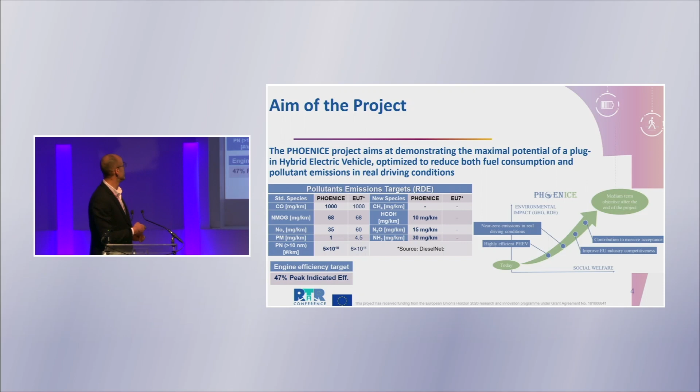In terms of pollutant emissions, you can see the PHOENICE target in the first column is more stringent than Euro 7, as compared in this table, specifically for particulate number and NOx. Additionally, we have some unregulated emissions that you can see here: formaldehyde, N2O, and NH3. This is regarding the emission target.

In terms of efficiency, we are aiming to achieve 47% efficiency on the thermal engine. That brings us to around 5 to 10% fuel consumption reduction, considering charge-sustaining mode, because we are dealing with a plug-in hybrid vehicle.

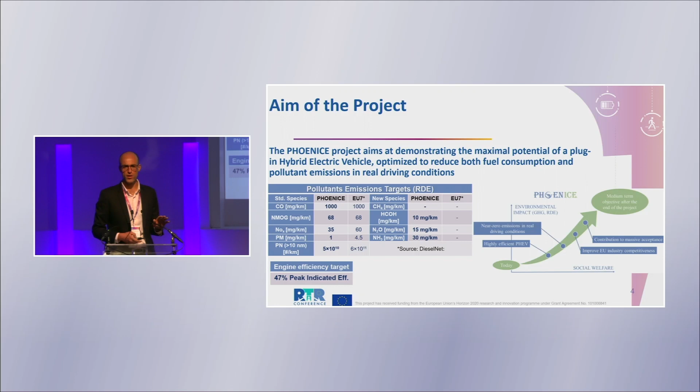Let me now introduce the baseline vehicle, which is a Jeep Compass from Chrysler, Stellantis Group. This vehicle is a PHEV SUV.

We have an internal combustion engine, state-of-the-art, with 1.3 gasoline direct injection, wastegate turbo, and also a variable valve actuation system, which is multi-air. Additionally, 2 electrical motors positioned in P0 and P4, with a reference autonomy of 50 kilometers.

However, it will be simulated to 80 kilometers during this project. This is the baseline vehicle.

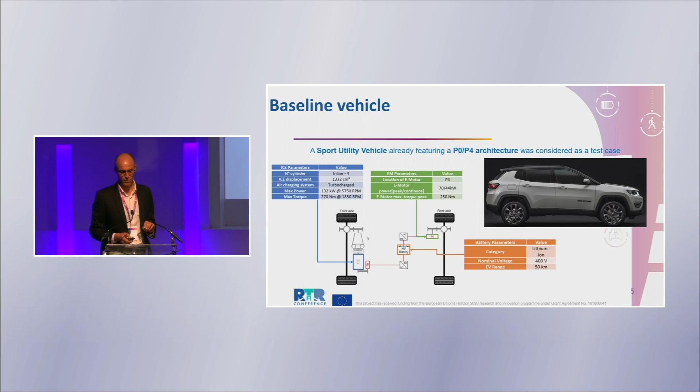How to achieve our project? We are working on different groups. The first group is the dual dilution combustion engine. Dual dilution means lean combustion, so dilution by air, but also exhaust gas recirculation, which will allow us, with additional technologies, to achieve 47% efficiency.

In parallel, we developed new components for the dedicated exhaust after-treatment system for lean burn, in order to meet our target. We can list an electrically heated catalyst, a new GPF with specific coating, and also SCR for NOx abatement under lean conditions.

We also investigated the potential of global efficiency increase using exhaust heat recovery systems. We investigated two of them, and finally, once we developed the different components and redesigned some components, we needed vehicle integration and development of additional controls.

So the integration of this new internal combustion engine, the exhaust after-treatment system, and the other parts were done according to an emission-based energy management strategy.

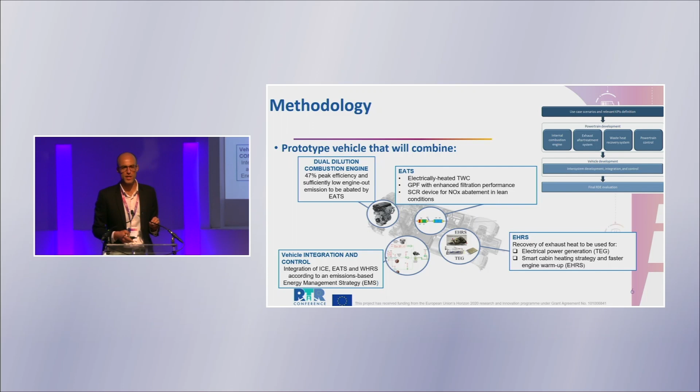Let's start with the development of the prototype engine. We started with the baseline 1.3 GSE called Fiat engine, which is the serial engine on this Jeep Compass. We increased the compression ratio.

Theoretically the maximum efficiency of an internal combustion engine is directly linked to the compression ratio, so we also adapted the con-rod. Additionally, we developed a cooled low pressure EGR system with Valeo that was implemented on this engine. We modified the cylinder head by applying the IFP Swumble approach in order to boost the flow motion.

The fuel system was increased to 350 bar of maximum pressure instead of 200, which is for the serial engine. We performed an additional optimization of the VVA system, and our partner, Garrett, developed specifically for this vehicle an electrified turbo.

So an E-turbo with a VNT, variable nozzle turbine, replacing the Wastegate serial turbo. It is a 48-volt E-turbo boosting system. All this modification and all these new components were implemented, and we manufactured 4 prototype PHOENICE engines. First one for steady-state calibration experiments, based at IFP Energies Nouvelles. Second one for transient calibration at Polytechnic Torino. Third one for the vehicle integration, and a fourth one is a spare part.

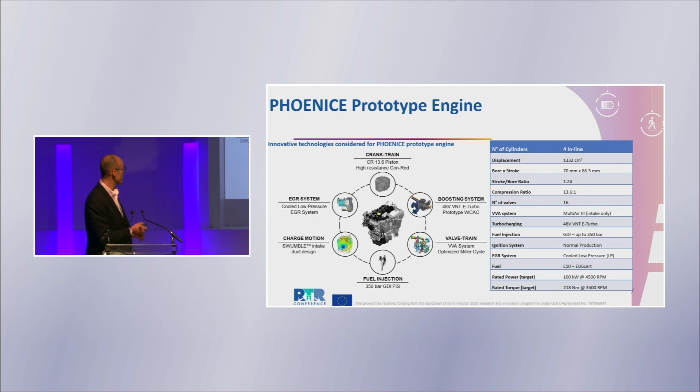In parallel, we also developed a digital twin. Starting from Stellantis, Centro Ricerche Fiat gave us a reference model for the reference engine, and Polytechnic Torino upgraded it in order to have the PHOENICE prototype model. It was validated with the first very early engine results, as you can see.

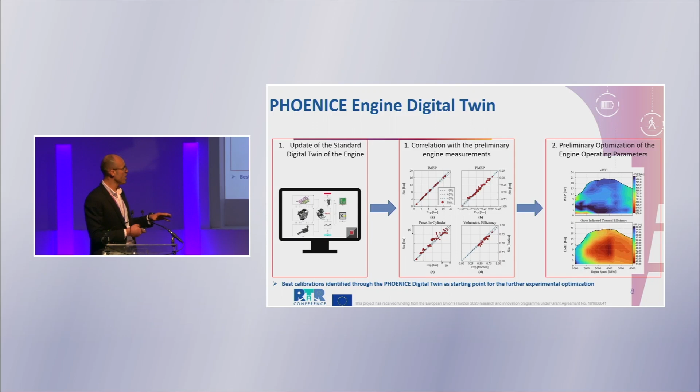This digital twin was used in order to pre-calibrate. You can see here an example on the right side of pre-calibration regarding the variable valve actuation. Once we identified the best set through this PHOENICE digital twin, we considered them as a starting point for further experimental optimization.

We installed the first prototype engine at IFPEN engine test bench and performed different optimizations. I'm not going through all the parameters because we have a large number of them, but this first graph illustrates the final results in terms of indicated efficiency.

On the y-axis, you can see the brake mean effective pressure, which is an image of torque, and on the x-axis, we have the engine speed. You can see that we were able to achieve almost 47% gross indicated efficiency. Compared to the reference engine, that's between 5 and 15% efficiency improvement.

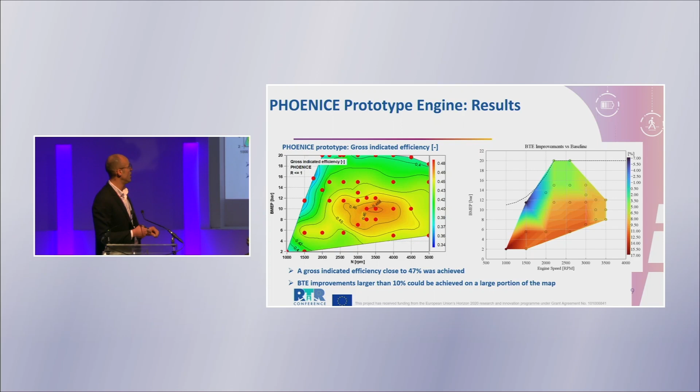This right side figure, with the same y and x axis, illustrates the difference in percentage between the prototype engine and the baseline engine. This can lead us to around 10% of global efficiency.

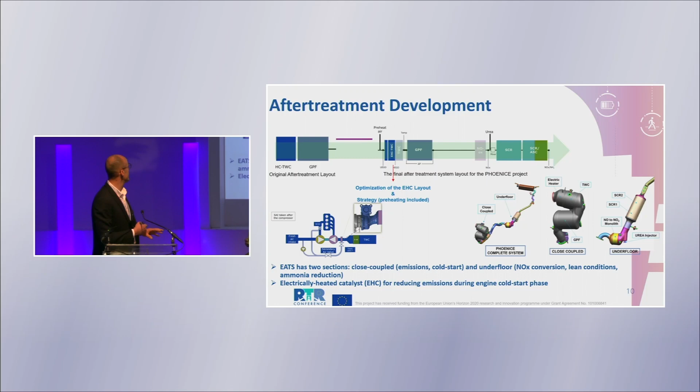Regarding the after-treatment system, the exhaust has two parts. The close-coupled one, typically for lambda 1 gasoline after-treatment, starts with an electrically heated catalyst for reducing emissions during engine cold start. We have a new three-way catalyst, a new GPF with specific coating. So this is the close-coupled part for lambda 1.

But we have also implemented and developed new components for NO oxidation, in order to optimize the NO and NO2 ratio, because it's very important for the SCR reaction. Then we have the urea system, the SCR, selective catalytic reduction, and also an ammonia slip catalyst. All these components were specifically developed for PHOENICE in order to achieve the target pollutant emissions, but also tested before the assembly, which was done by Marelli.

This assembled exhaust line equipped the second engine, which is for transition calibration, and the one that goes to the prototype vehicle.

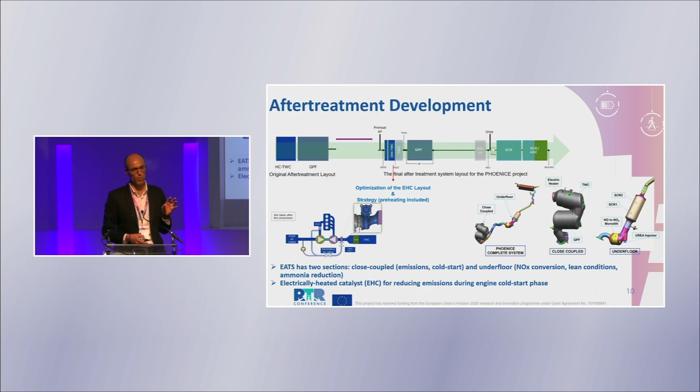We have also performed transition calibration at Polytechnic Torino, in order to calibrate the engine to switch between different modes - low, lean, lambda 1, EGR - depending on the coolant temperature and on the exhaust temperature. This is to perform a kind of trade-off between exhaust emissions and engine efficiency.

Once this is done, you can see on the right side, we disassembled the normal production vehicle. Then we implemented all the different components, but also a new 48-volt system, because the e-turbo and the e-cata needed this 48-volt system. Successful integration was done by FEV Italy with the support of Stellantis, and functionality testing of the installed SCR urea dosing was performed.

I'll go quickly because we will see more interesting pictures and video later. The last phase was to fine-tune this vehicle calibration in order to comply with the worst-case real driving emissions, which we developed in work package 1.

During this project, you can see very impressive acceleration. Here we cannot see the slope, but it's almost 2 hours of RDE cycle with different velocities - it can go up to 100, it can go to 135, almost 140 kilometers per hour.

So the calibration is proven. The vehicle is delivered for final tests that are going on this month, because it's the last month of the project. The last task is to validate this prototype on the WLTC cycle to assess the CO2 gain with respect to the reference vehicle, but also to assess the pollutant emissions.

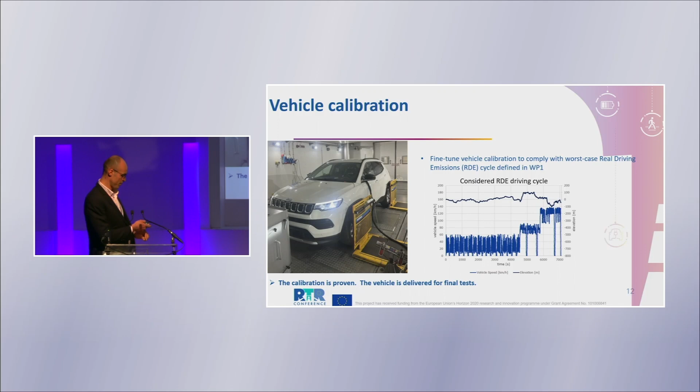This project provides a new high efficiency combustion system, a study of the potential of heat recovery systems, the exhaust after-treatment system developed specifically for a lean gasoline engine, and a lot of know-how and methods for virtual calibration.

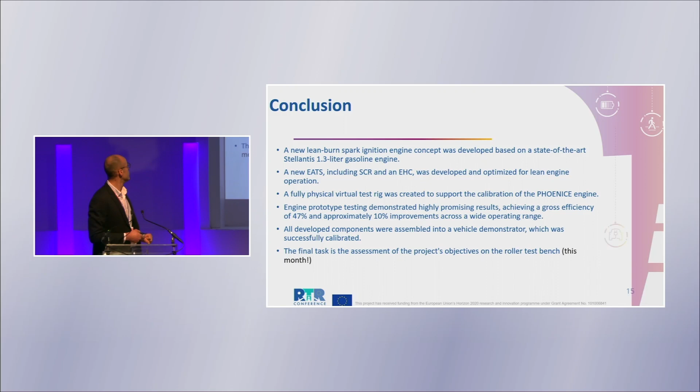Those are the communications that we presented. I can summarize here, but to not repeat what I mentioned, I prefer to go through some images and video.

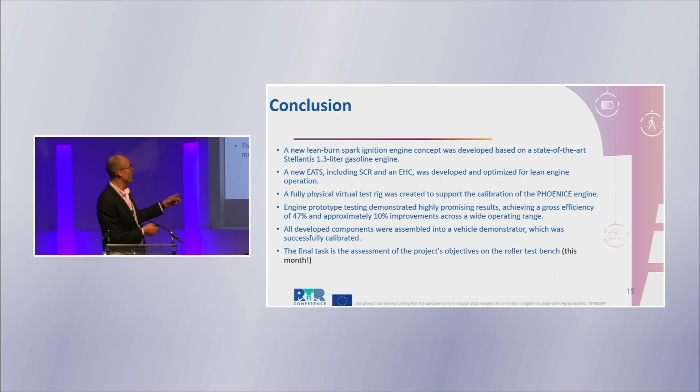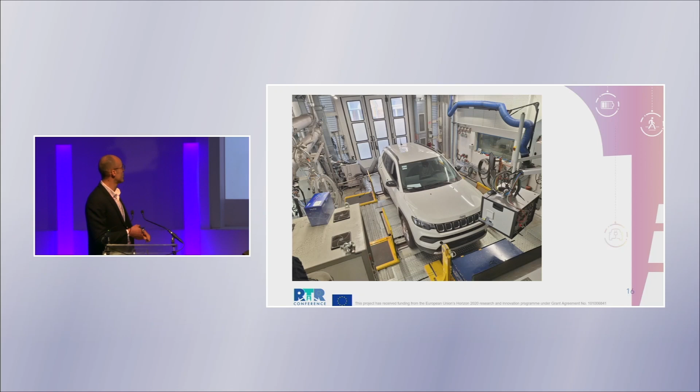Okay, so these are from this month, very recent, that's why they weren't integrated into the presentation. This is a prototype vehicle that is prepared to go through the test.

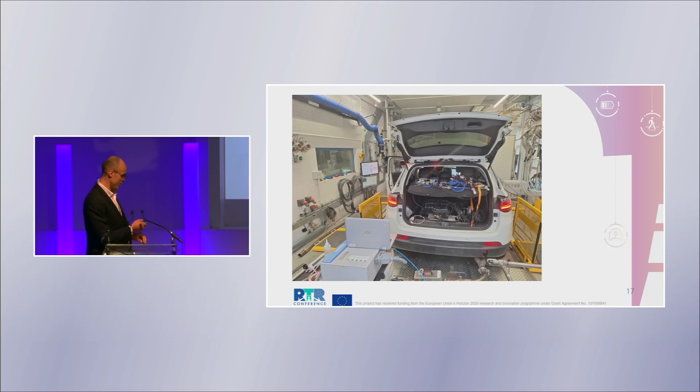Here you can see all the prototyping in terms of control. You can see all the urea systems that were installed. This is only a partial view of the system.

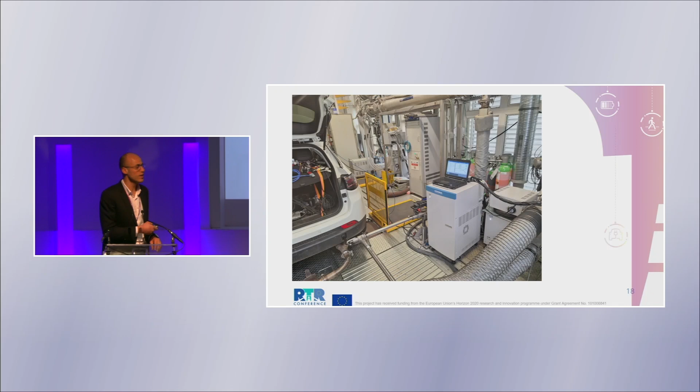Here we can see the FTIR specifically, in order to measure the unregulated emissions, in addition to the particle number emission for example, and also the classical emissions that were measured.

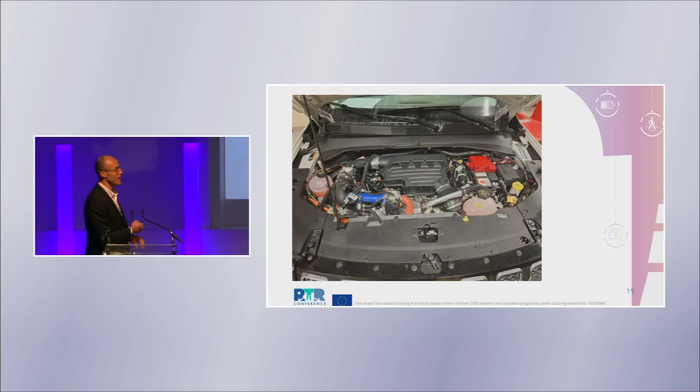These are all the components that were very well integrated, so we can close the hood and drive the vehicle. This was a challenge because we have EGR and many components.

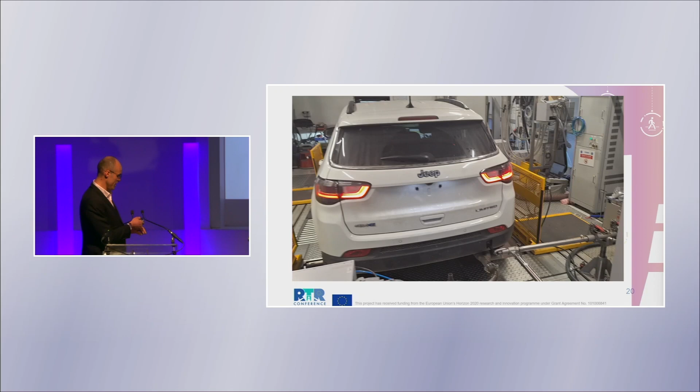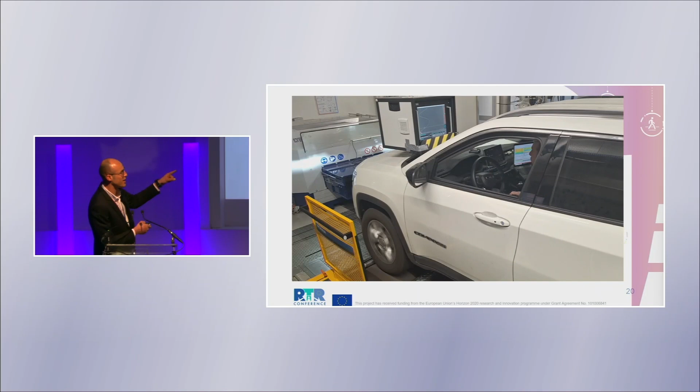Here is a video during the RDE calibration cycle. You can find the same cycle as illustrated on my slide, and you will see the driver trying to follow it, with deceleration then acceleration. On the y-axis you have the speed. This is the PHOENICE project running on the defined RDE cycle.

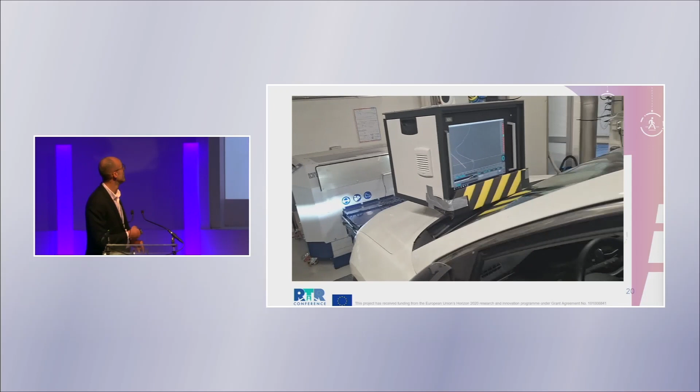Thank you for your attention, and I'm happy to take any questions later.

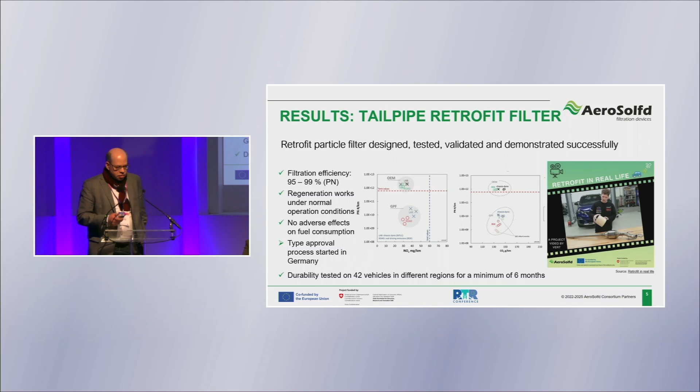Let's give you some pictures. Regarding the exhaust, there's a great video on LinkedIn and on our website. Done in Lichtensteig, you see the whole process of retrofitting a car - getting the old exhaust system out and the new one in. If you look at the diagrams, you can see on top the OE, and then the reduced particles with the retrofit solution. It's working fine.

There is no bad effect on fuel consumption. For NOx, we said if the original solution is not working, then we replace it with the original solution because that should work - so there is no NOx part on our side, we just focus on the particles. We achieve high efficiency. We have run the vehicles in Europe - great work, no problem. Even the regeneration works under the conditions for the gasoline engines.

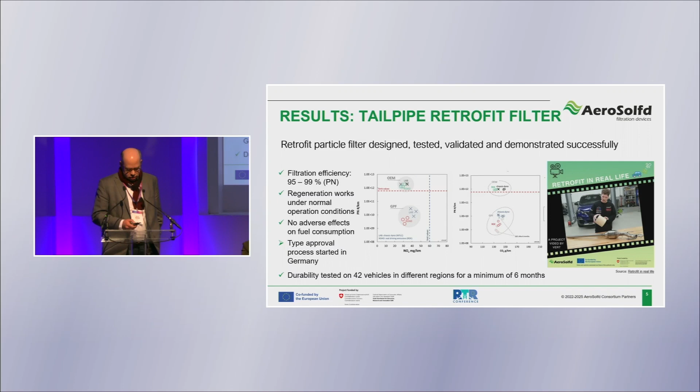Regarding the brake emissions, our focus is to look at what's really happening in the city and what the health effects are later if we reduce particles there. So we did measurements in Valladolid, in Ljubljana, and Ancona with ICE engines as they're running, and Mauricio insisted on doing that with hybrid, and we wanted to get the CAN bus data.

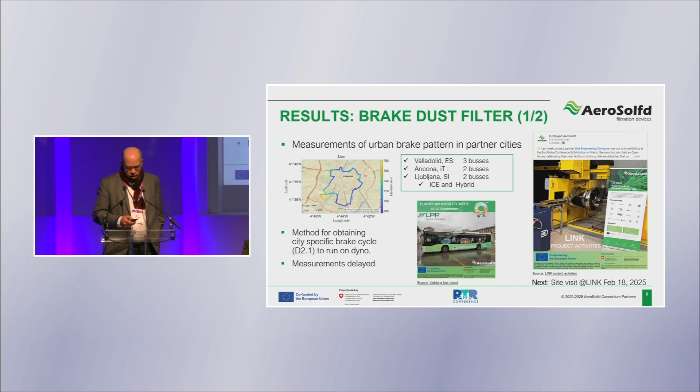This took us a long time - we waited and asked again and again, and finally we got access to it. Now we have the data, we can really see when the bus is braking, when it's recuperating. So we are analyzing the data at the moment. The tests are starting at Link for the emissions. Unfortunately, we have to postpone that site visit because we don't have the data yet. It will be in March or April when we have the site visit scheduled.

What else did we do? It's about healthier aerosols in urban cities - what is your exposure if you are standing at a bus station? It would be nice to measure that in a city, but with scientific grade equipment you can't place it in a public space. Luckily, we have the bus partner AUVASA - they have a bus depot. So whenever a bus returns, we put a line over there on the street and said, stop here. And then we measured the bus braking, both inside the bus and outside the bus.

Unfortunately, some pictures had the bus driver in them, so we had a GDPR topic to solve. It's solved now, we can work with the data. Also, our partner ZF showed the brake dust particle filter at the IAA truck, a big exhibition. You can see that truck with the glass transparent window. The filter was a great success, from what I've been told.

People are interested, and it will now go on the trucks in Sweden, in Finland, for the winter testing. It passed all the tests, it passed on the road, so we're looking forward.

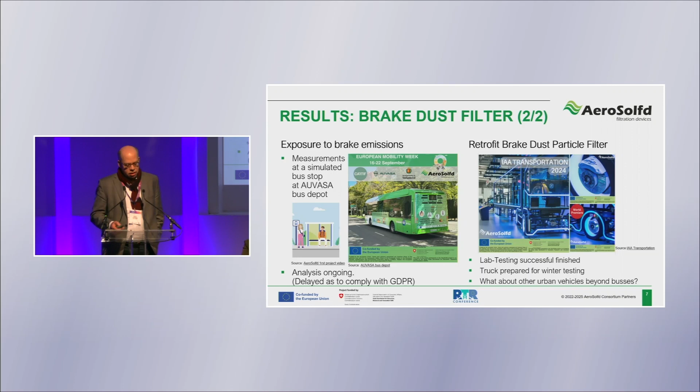And it came up the idea, why only buses? It can also be for waste collecting vehicles. So there could be a broader application for vehicles that are in an urban area, because their braking is different than if they would be on the long haul.

For the metro stations, we presented last time that we have identified tracers to let us know what emissions, what the exposure is related to the braking. This has been done, and now the installation.

One of the concerns was, what about vandalism? Will they be destroyed? Will they be spraying on? Luckily, this was a station where there's a football stadium close by, so there was a game with British football fans, no problem. There was also a concert of Taylor Swift, no problem. So we had all the extremes, it working great.

What did not work were the measurements. Some sensors failed, there was Sahara dust at that time when we did the measurements, so a lot of confusing things. We also had to learn that the HVAC system is turned off in the evening, so getting results, we can't make much out of that. So we had a lot of lessons learned.

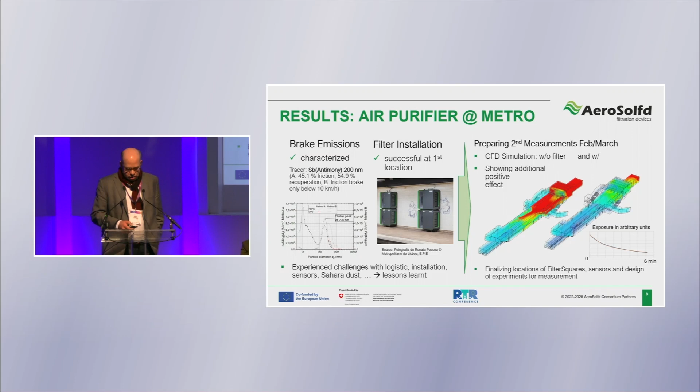So with filtration, we can see an effect. And if you look at the decay, the effect will also be within a few minutes, so that's important because trains are passing and trains are putting new emissions in. And this will work quite well. We have placed the sensors, we have decided where to put the filters. So measurements will start. Quotation is currently going on for the installation, and measurements will start in a month.

What else did we do? Preparing the market. We need to convince people that this is a great solution for an immediate effect on urban air quality. We are presenting at conferences.

We organized a workshop on metro air quality. That was a great workshop. It's a big topic, but nobody wants to talk about it. If you talk to cities, they say, oh yeah, perhaps, but we are commuting, we are the backbone of the city, don't talk about air quality. But we have to, and there are cities that do that, and they want to make their customers happy, and there are now solutions that we can use.

So we have been at Polis, and we have been at other places as well. So what will be the long-term effects? What will be the impact that we can generate with solid data, with a good environmental life cycle assessment?

The retrofit solution, it works. You don't need to get a new car, you can get the retrofit solution. Citizens will be happy, the city has a better air quality, so that should sell and that should work.

For the brake dust particle filter, we are almost close with the type approval, so that piece can go in the market. We have demonstrated that the solution is working, no problems. It will survive the filter test, the winter testing.

For the metro station, we are still missing some final proof of the exposure. Data is coming. For the life cycle assessment, this we need to do because we need solid data, we can't just do that with dummy values. So that will be the big task to continue on that.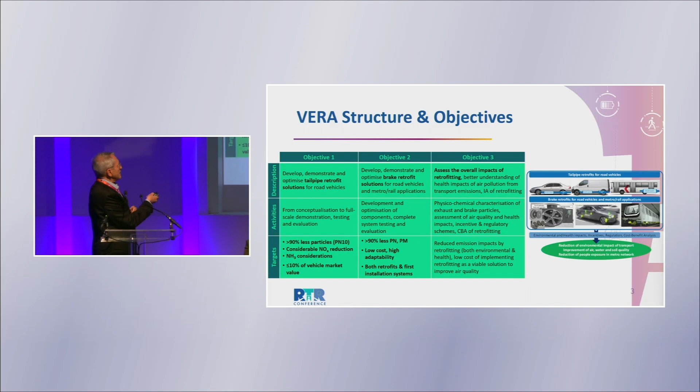It was not a straightforward exercise to select the vehicles. It was easier to look at brakes, because brakes have not been really looked after until now. Therefore, it was relatively more straightforward to decide what kind of retrofitting we could do. And as I said in the beginning, our main objective is really to assess the overall impacts in terms of cost effectiveness. So what did we do?

If we start with the exhaust retrofitting, first we looked at the market to see if there is any available market system, and we didn't find one, but a prototype.

This is a HJS, which is nothing particular, if I may say that. It's just a GPF, canned, bare GPF, without any catalyst on it. But we took it and installed it in a difficult environment, which is a PHEV Golf. This was a Euro 6B, and we tested it over a relatively large number of mileage. And we saw, as we were expecting, a very high efficiency of more than 90%. Even more interesting, this efficiency was improving as ash was accumulating in the filter, which was expected, without effect on pollutant emissions and without effects on CO2 emissions, which means fuel efficiency.

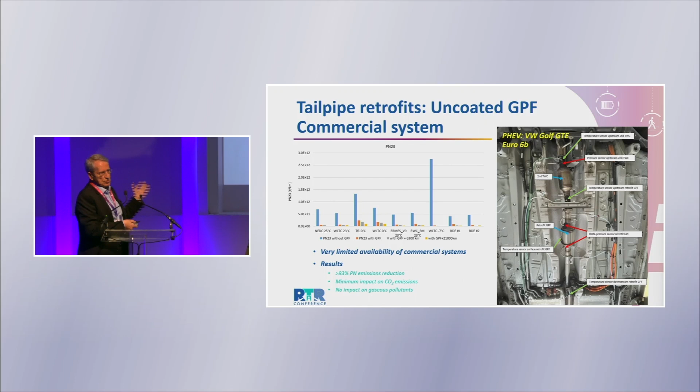So we said, okay, as our sister project does, I think we just validated that this is a possible approach. Then we said, what is the innovation we can bring in, and how can this innovation be reflected into the project? That's why we turned into a low-cost three-way catalyst.

This low-cost catalyst is a copper-based three-way catalyst. As a matter of fact, copper partially replaces platinum, but of course it continues to operate together with rhodium in a low PGM environment. Our colleagues here from Athens claim that this can replace something like 80% of the overall PGM loading of a catalyst.

And this is what we have. We have a substrate of zirconia and ceria, of course, which is the standard substrate, and we have this type of catalyst.

We want to test it in two applications. One is a PFI vehicle, which was selected, and the other one is a DI vehicle, gasoline DI, together with natural gas operation. It's a Skoda Octavia, called monofuel because it has natural gas and gasoline, but gasoline is 9 liters, so it's basically used only for starting the vehicle.

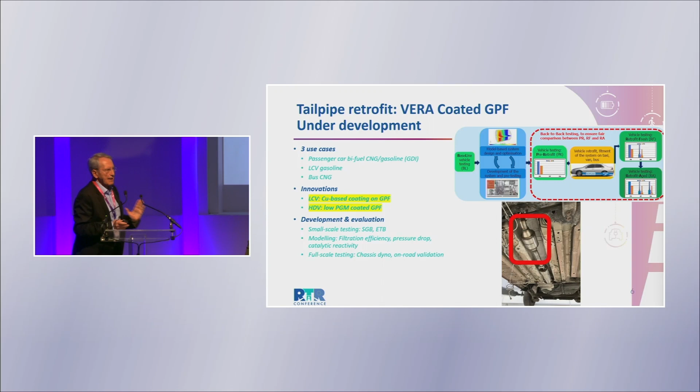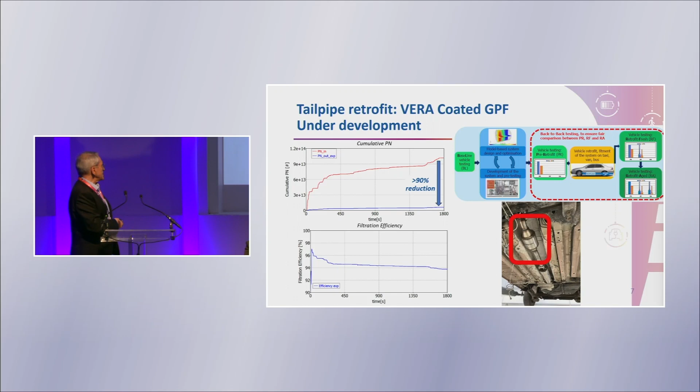Our first results, of course, indicate that we have a very good particle number efficiency of more than 94% over WLTP and many other cycles. So this was not our concern.

I'm not going to show any gaseous emissions effects. We don't have the expected 50 or 60%. What we do have is zero at cold start conditions, because the catalyst is placed in an underfloor position which is far away, so it cannot really heat up easily. But when the whole thing operates correctly, meaning the catalyst is heated up, we have an additional reduction in the range of 10 to 15%, additional to the initial reduction produced by the original three-way catalyst.

Now, the brake retrofit is an easier thing, easier from a concept point of view. Don't misunderstand, it's much more complicated in terms of application. Here what we do is use three approaches: one is an engineered cast iron disc with a tailored pad, the second solution is a coated disc with a tailored pad, and then a filtration system. All of them to be applied in different applications of vehicles.

We are testing them both in a brake standardized dyno, but also under real-world conditions using this equipped Audi—sorry, it's a VW, but it is operated by Audi—vehicle, which is fully equipped for on-road testing of innovative brake solutions.

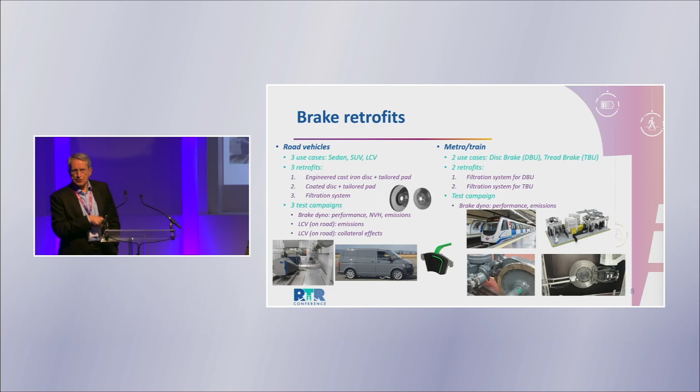And then we also do a similar thing in a metro, in the metro of Madrid, but we're not following the approach of AeroSolfd. Actually, we're installing, or we want to see what the effect of a filter will be on the brake emissions on the train, following the same approach as for cars.

And the first results on the brake dyno test indicate that the cast iron disc and pad, which is the easiest solution, already show very high efficiencies. And these efficiencies are even better when the vehicles are smaller.

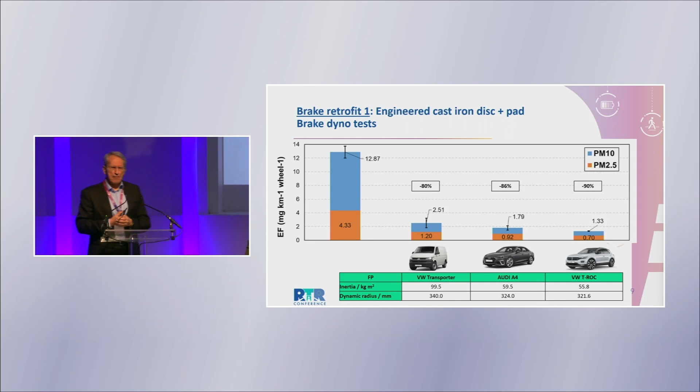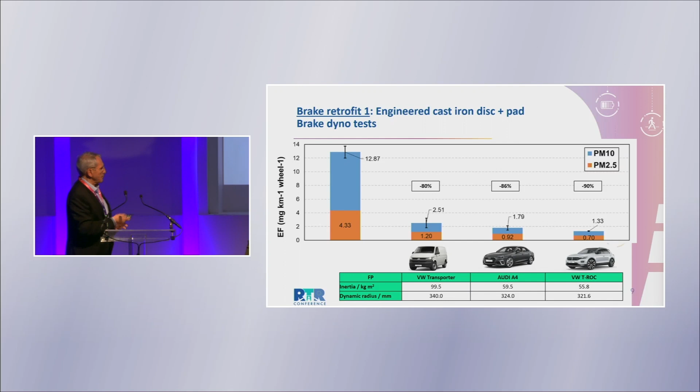This is done on the basis of the brake dyno tests, and confirmed also by on-road testing. It's of interest because one can imagine that since every car has to replace its pads, and also its brakes, all replacements after a certain point on existing conventional cars can be done with improved brake systems for particle emissions.

We have collected data looking at baseline emissions, and what I want you to take away is that there's a very close, almost linear relationship between friction on the brakes and particle emissions. However, brake particle emissions are extremely low, at least 100 times lower in magnitude than the exhaust emission level of a DPF or GPF equipped vehicle. So we're talking about a different chemical and physical characterization of those particles.

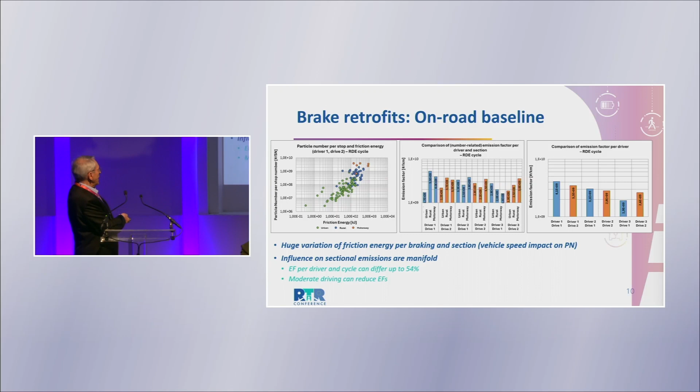Drivers can play a very important role in overall emissions. This is also something done in AeroSolfd, but we're going a bit of a different direction. We want an overall impact assessment to feed into our cost effectiveness and cost-impact calculations. So in addition, we're running a relatively large physical-chemical characterization.

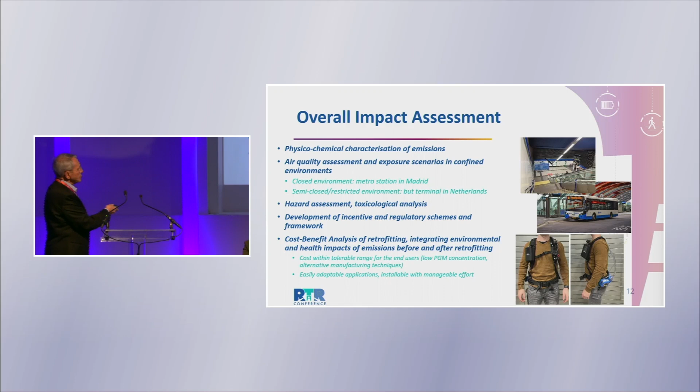We're also looking at air quality and exposure scenarios in confined places, like metro stations and bus depots, and running toxicological analysis of these particles in parallel. We're trying to collaborate more closely with others, including our sister project, on incentive and regulatory schemes that can support this activity, since we want to feed this into our cost-benefit analysis.

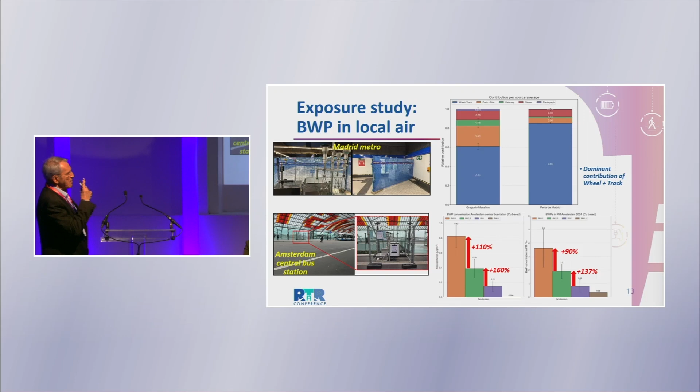We've done measurements at the Madrid metro, similar to what Martin mentioned before. We put our installation within a confined area so it wasn't really affected by people. This installation by TNO was set up in the metro in Madrid, and also in Amsterdam. First results from Madrid, at two metro stations we measured, show that 60 to 80% of emissions measured inside the metro station come from wheel and track friction, not from the brakes. The brakes contribute something like 20%, or less, overall in these areas.

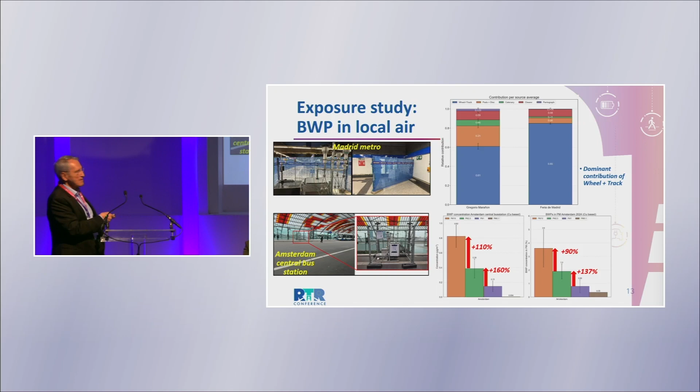We're getting something similar from Amsterdam, where comparing measurements in the bus depot and the city, we see big differences. Also important, if you look at the small percentages, something like 4 to 5% in Amsterdam are expected to come from brake emissions, out of the particle emissions.